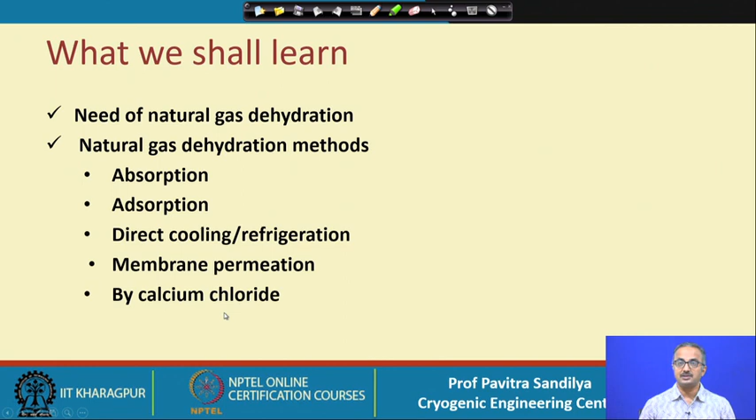Welcome. After learning the basics of the various processes involved in natural gas processing like heat transfer, fluid mechanics, mass transfer, etc., now we shall go to the actual processes, one of them being dehydration. This lecture will cover the need for gas dehydration and methods like absorption, adsorption, direct cooling, membrane separation, and use of calcium chloride.

So first let us see why we need to dehydrate natural gas. There are various reasons for that. One is to avoid formation of gas hydrates, which form when water adsorbs or captures gases like methane, ethane, or carbon dioxide present in the natural gas, forming a solid that looks like ice.

These hydrates, when formed, can choke plug valves, fittings, and pipelines, and water can also react with acid gases like H2S, CO2, etc., corroding the pipelines and equipment.

Then water itself can freeze and form ice, causing erosion and corrosion of pipelines. If we are carrying out cryogenic processes like liquefaction of natural gas, these become difficult in the presence of water, because water will freeze and choke the pipelines.

Presence of water vapor also increases the volume of the natural gas and reduces its calorific or heating value. So these are some of the reasons for which we need to dehydrate or remove water from natural gas.

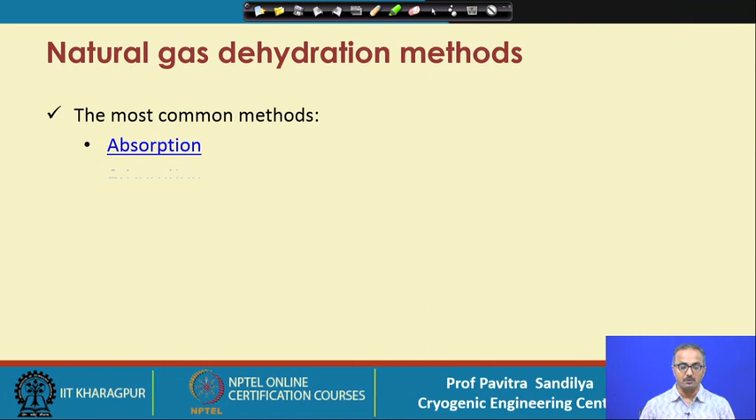Here are some common dehydration methods: absorption, adsorption, direct cooling or refrigeration, and some less common methods being developed, like membrane permeation and use of calcium chloride. Membrane permeation is still being researched, but for now we are more concerned with absorption, adsorption, and direct cooling. Let us see each of these processes one by one.

In absorption, a very common process, water is removed by absorbing it in a solvent. The solvents used in this industry are glycols: monoethylene glycol, diethylene glycol, triethylene glycol, and tetraethylene glycol. These are some commonly used solvents to remove water, and among these, triethylene glycol, or TEG, is most common.

Why? Because among all the glycols, it is easier to regenerate. These glycols are regenerated by passing steam over them, so it is easy to regenerate TEG, and we can get about 98 to 99% of the TEG back after regeneration. It also has a higher theoretical decomposition temperature.

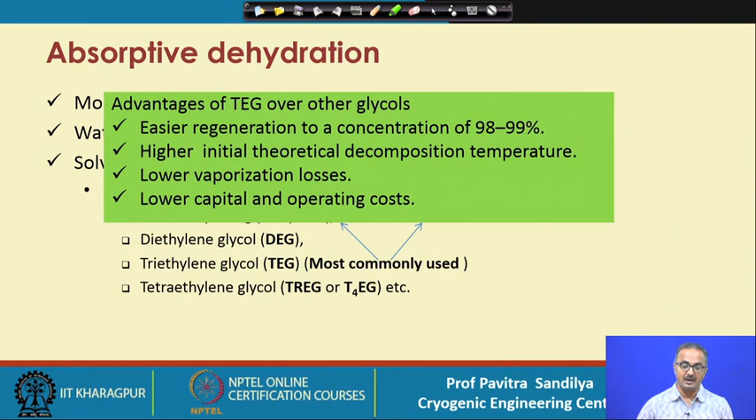We want the solvent to not decompose at high temperatures. TEG has a very high decomposition temperature, meaning it is quite stable, and it has low vaporization losses, meaning it will not vaporize easily into the natural gas, reducing contamination of the gas. It also has quite low capital and operating costs.

Here is a typical representation of absorption of water by TEG. The wet gas, meaning natural gas with water, comes through a scrubber. In the scrubber we remove all particulate matter, and then it goes to a column which we call the absorber, where we contact it with the TEG.

We call it lean TEG, meaning it has less water. It goes down while the gas moves up due to buoyancy, and at the bottom we get rich TEG, meaning it now has a lot of water with it. This rich TEG is again flashed, and we learned about flash earlier, so we can see applications of the fundamentals we learned earlier in this processing of natural gas.

Here we find that by flash, the hydrocarbon vapors are taken out and we get rich TEG. This is further passed through an exchanger, where we are passing in some oil to get back the TEG. Ultimately, we put the lean TEG back into the column, whereas the gas goes out of the column with reduced water content, and we call it dehydrated gas. So this is the overall representation of the dehydration process.

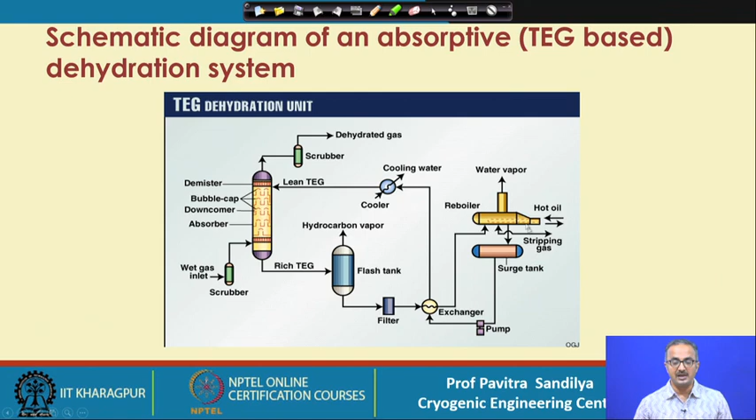The advantages of this absorptive dehydration process are that it has low equipment cost, it offers less pressure drop, and that pressure drop translates into pumping cost. So we are reducing the pumping cost also, and it is a continuous operation.

That means we do not need to make up the loss, because we are not losing much of the TEG. We are able to recover almost 98 to 99% of TEG, so we do not need to put too much makeup TEG or solvent into the system. We have little problem in recharging the tower, and it can handle fouling-causing materials, which pose a problem in adsorptive dehydration.

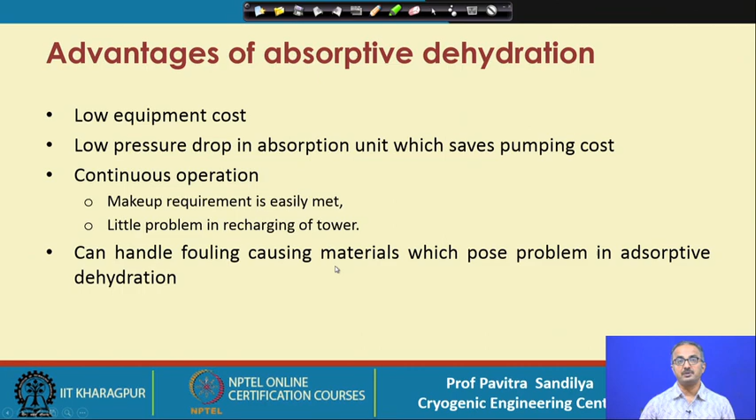So we are reducing the chances of fouling, but it has some disadvantages also, like the glycol solutions may get contaminated by suspended matter like iron oxides, from rusting. If there is rusting, iron oxide will come from there, along with scale formation, dirt, etc. These can contaminate the glycols.

Then there could be sludge formation when the glycols get overheated, and this sludge collects on the surfaces of the various equipment. It may also cause stoppage of flow, and it will reduce proper contact between the solvent and the gas, reducing the efficiency of dehydration.

Then they may form corrosion products by reacting with oxygen and hydrogen sulfide. They also need a separation unit to remove hydrocarbons, water and lubricating oil from natural gas, otherwise these will react with the glycols and cause foaming.

And when there is a lot of foam, the gas will carry over the liquid along with it. So there will be loss of this material, increase in viscosity, or even freezing of glycol at lower temperatures. That means the glycol may freeze at lower temperatures.

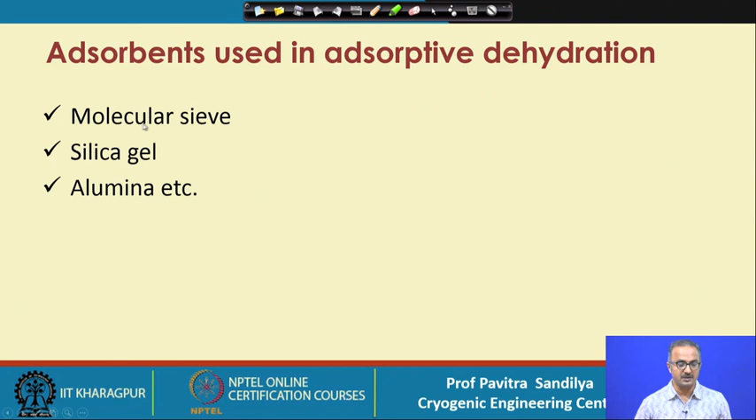Now we go to another topic, adsorption. In adsorption, we have various types of adsorbents used, like molecular sieve, silica gel, alumina, etc. And these are the factors involved.

Then the hydrocarbon binders present in the molecular sieve get partially oxidized in the presence of oxygen. So we have to make sure there is no oxygen in the system, because once the molecular sieve gets partially oxidized, it will form alcohol and carboxylic acid, which will turn into water and carbon dioxide.

This oxygen can also convert H2S into elemental sulfur, sulfur dioxide and water, and it can produce olefins that form coke and deposit in the bed. If they deposit on the bed, they will choke it and reduce the capacity of adsorption.

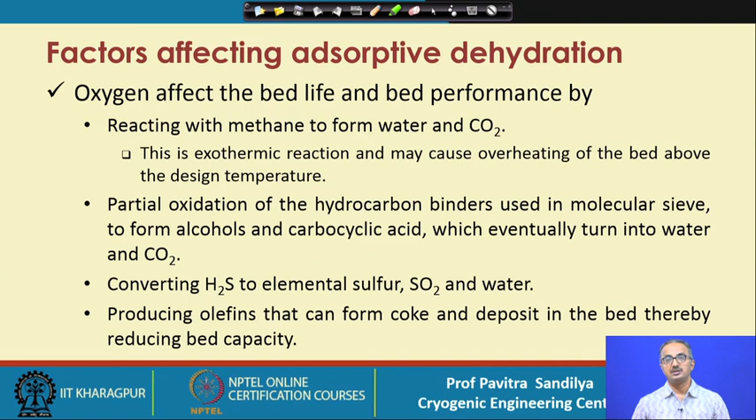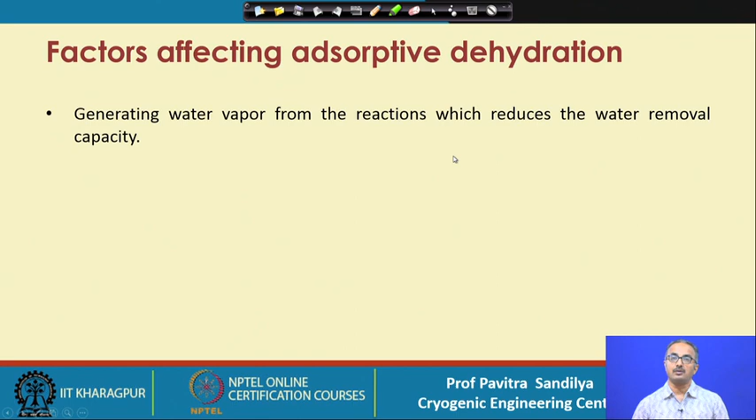Oxygen will also generate water vapor when it reacts with other hydrocarbons, and this will cause a reduction in water removal capacity by generating extra water due to these reactions.

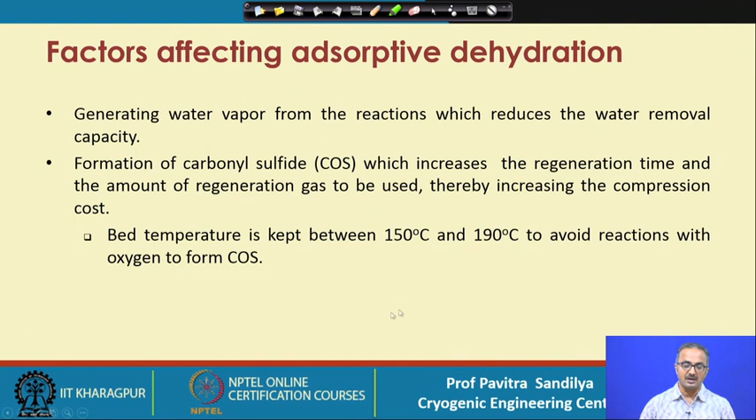It can also form carbonyl sulfide, which increases the regeneration time and the amount of regeneration gas needed, increasing the cost of gas compression. The bed temperature should be kept between 150 and 190 degrees centigrade to avoid any reaction forming carbonyl sulfide. Here is a typical adsorption system for dehydration.

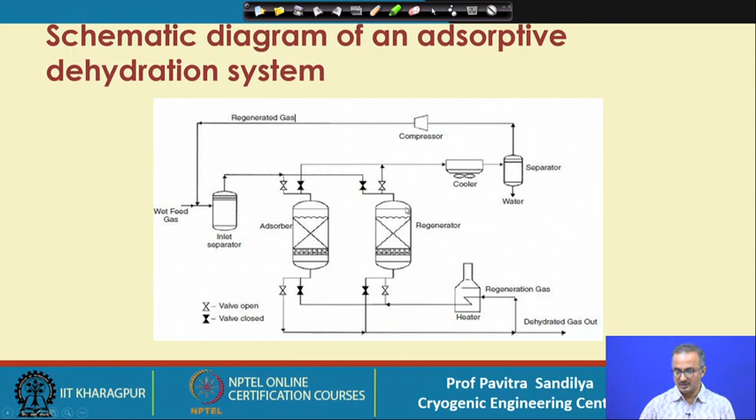Now let us look into the advantages of adsorptive dehydration. We find that they have a lower dew point, and we learned that dew point represents the water content of the natural gas. So a lower dew point means less water, and they can give better dehydration for the natural gas. They are also less affected by changes in flow rate, pressure and temperature.

They are less susceptible to corrosion or foaming, which was the case with the solvents—solvents can foam, but this is not the case here. They are best suited for large volumes of gas under high pressure, and they have higher contact temperatures that may be tolerated with some adsorbents without causing destruction of the adsorbent, meaning destruction in terms of their chemical or physical nature. So they cannot get destroyed by higher temperature.

Some of them can withstand high temperature, and they have high tolerance to sudden load changes, especially during startup. If there is a change in the flow rate of the feed natural gas, they can still sustain operation without sacrificing performance. They can be quickly started up after shutdown, and they have high adaptability to some hydrocarbons in addition to dehydration functions.

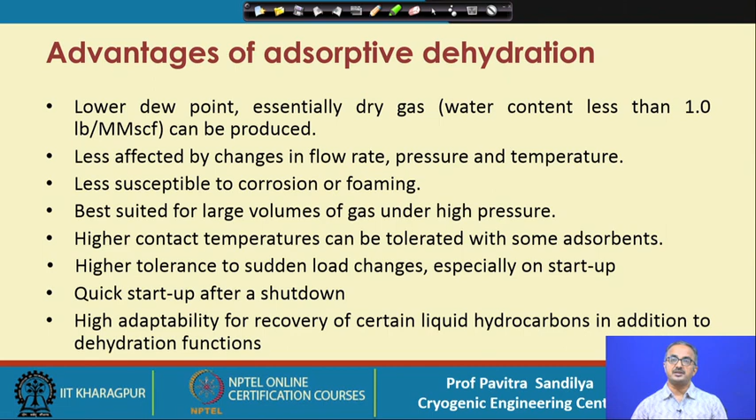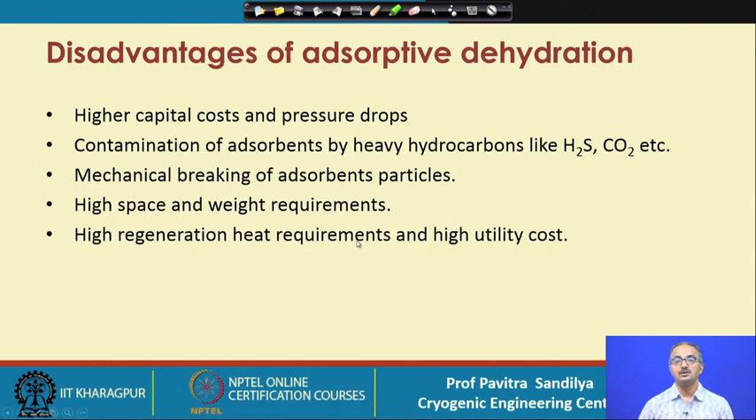They also have some disadvantages, like high capital cost, and they result in higher pressure drop. They can get contaminated by heavy hydrocarbons like H2S and non-hydrocarbons like CO2, and they can undergo mechanical breaking due to attrition. They need high space for accommodation, which increases the weight of the system, and they have high regeneration requirements, meaning the heat or energy requirement for regeneration is higher for these adsorbents.

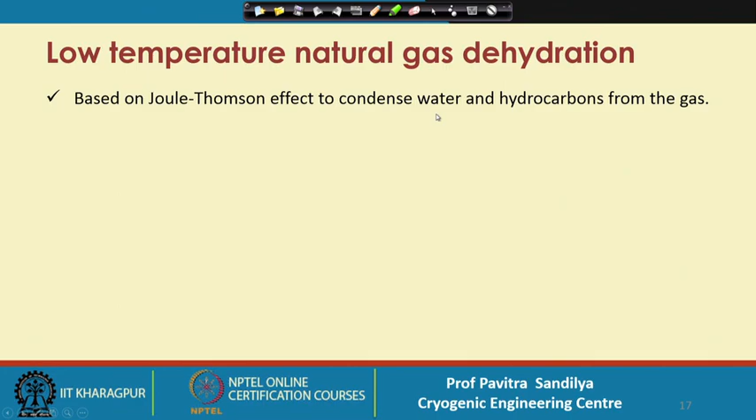Now we come to direct cooling or refrigeration. Here we find there is a Joule-Thomson effect. This effect is found when we pass gas through a valve, and on expansion downstream of the valve, there can be a reduction in the temperature of the gas. This effect is called the Joule-Thomson effect, after the two scientists who discovered this phenomenon. So this effect is the basis of cooling the natural gas, and when the temperature is lowered, the water vapor can get condensed out from the natural gas.

But in this case, gas hydrates may get formed, and as we learned, gas hydrate formation has a bad effect on the process because they will choke the system. To reduce the formation of gas hydrates, we can inject some of the glycols which we are using for absorbing water, so that these gas hydrates get destabilized and will not form.

The other way is that we externally heat the system to destroy these hydrates. So these are the things we have to do if we find there is too much cooling and water is going towards solidification.

By this low temperature dehydration, we can remove both the water and the natural gas liquids, that is NGL, about which we shall learn later on.

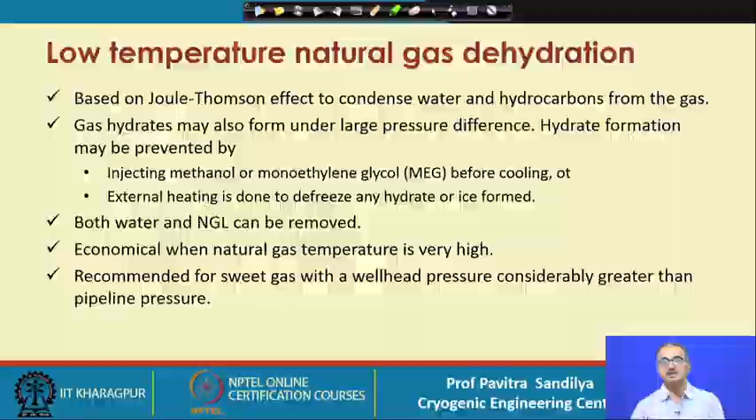This is economical when natural gas temperature is very high, and it is recommended for sweet gas with a wellhead pressure considerably greater than pipeline, because when the pressure is very high, on this Joule-Thomson expansion we get higher cooling. So a high pressure is desirable upstream of the Joule-Thomson valve. If the initial pressure of the natural gas is high, then this works very efficiently.

This is often used not alone, but in conjunction with other dehydration processes, like with solvents or adsorption, we use this low temperature method.

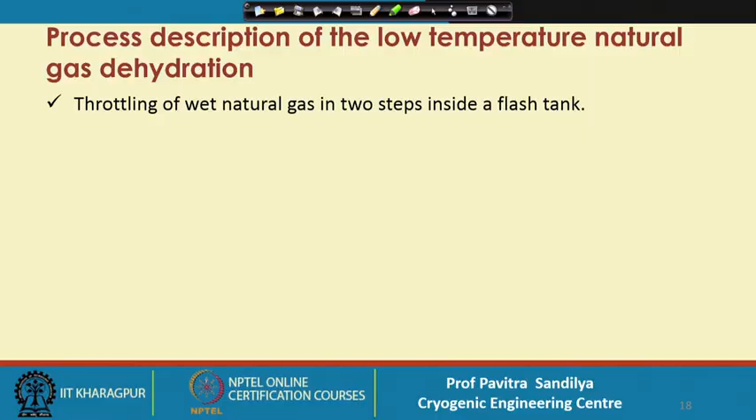Now here we have the process description. What we first do is throttle the wet natural gas in 2 steps, and with this Joule-Thomson valve, it causes partial condensation of water vapor, and the droplets are removed by demister inside the flash tank. Then we use some air pre-cooler and external cooler, if we find the pressure difference is insufficient to cause enough cooling by the JT valve.

When we are using this pre-cooler or external cooler to compensate for the reduced cooling by the JT valve, what we are essentially doing is increasing the operating cost of the processing. So if the usable pressure difference is large, then JT causes more cooling.

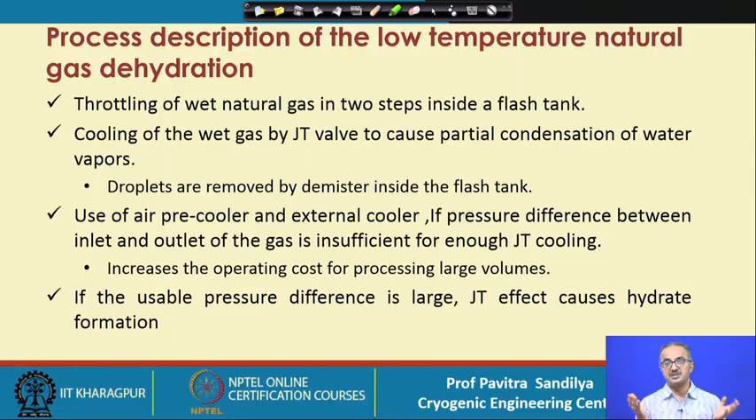As I told you, if we have a very large pressure difference between the inlet and outlet of the JT valve, we will find there will be enormous amount of cooling, and that cooling may result in hydrate formation. So whenever we are operating such plants, we have to see to it that the delta P, that is the pressure difference across the valve, is not too small or too high.

If it's too small, it will be needing some pre-cooling, and if it is too high, it may lead to hydrate formation. So these are the ways we have to optimally choose the operating conditions and the other equipment. External heating will be needed if there is any kind of hydrate formation or formation of ice.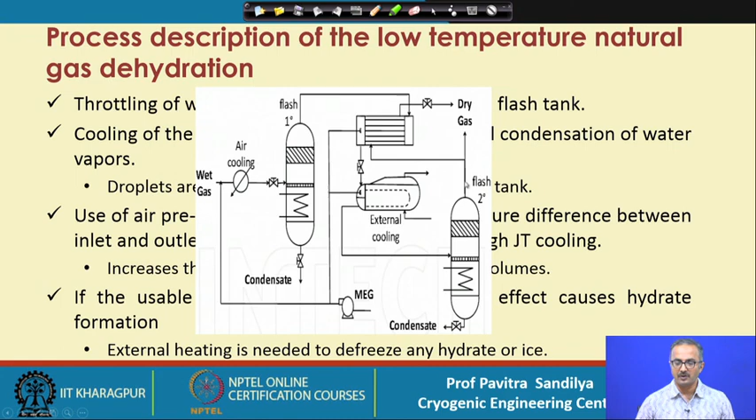Here we find that we are putting a glycol. As we said, this works well in conjunction with another system, like in this case we are doing absorption. So this glycol is put to again dehydrate this thing, and this is done in 2 steps to remove the condensate, that is basically water, from the natural gas, and ultimately we get the dried gas from this second column.

Now the advantages and disadvantages are like this: in the advantages, this low temperature dehydration can meet water and hydrocarbon specifications for pipeline gases when we have enough or high enough wellhead pressure available, and their operating cost is low if we have the naturally occurring pressure, and the corrosion problem is also minimal, especially when the hydrates are not formed.

But their disadvantages are that they are less efficient, as they cannot lower the dew point of the water for pipeline transfer. If they cannot lower the dew point, it means they are not removing enough water from the natural gas, and they are unattractive when we do not have enough wellhead pressure.

That means we try to utilize the wellhead pressure to drive this particular type of process without the use of any kind of compressors, and we have to use some hydrate inhibitors and some external refrigeration. These will increase the capital cost and the operating cost. That means to remove water, again we are adding another chemical which is in a way also increasing the processing cost of the natural gas.

Then we have other methods like membrane permeation. In membrane permeation, what we are doing is having this feed gas which is pre-treated to remove any kind of particulate matter, then it is heated and then it passes through some membrane.

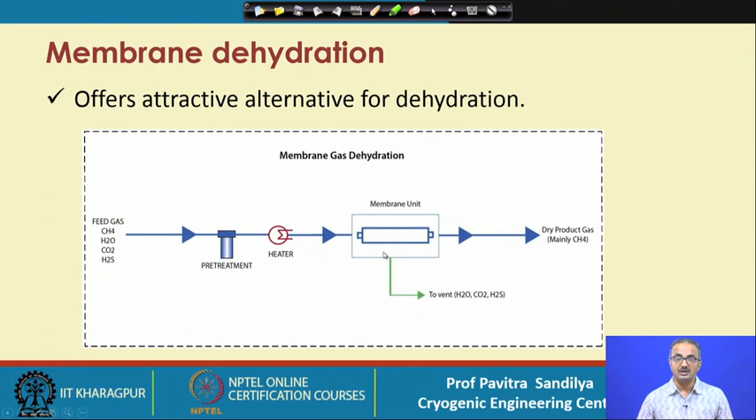And what are membranes? As we learned, membranes are some semi-permeable barrier, so they will retain some of these solutes and some of them will be passing through the membrane. We find that through the membrane, H2O, CO2, H2S are passing through. That means the gas which is retained on the membrane will be almost a dry gas. So this is how the membrane is working for dehydration.

The preferred operating conditions are that inlet gas must be at least 10 degrees centigrade above the dew point of water. Otherwise, the water will condense and settle over the membrane surface, preventing further separation.

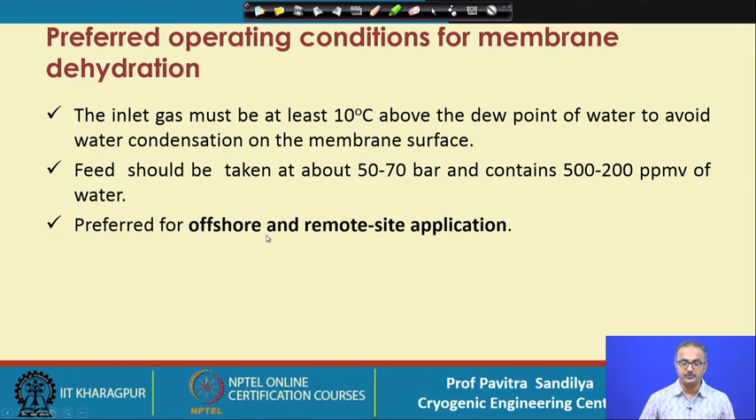The feed should be taken at very high pressure with very low contaminants, because high pressure is needed for driving the particular solute through the membrane. These conditions are generally preferred for offshore and remote site applications.

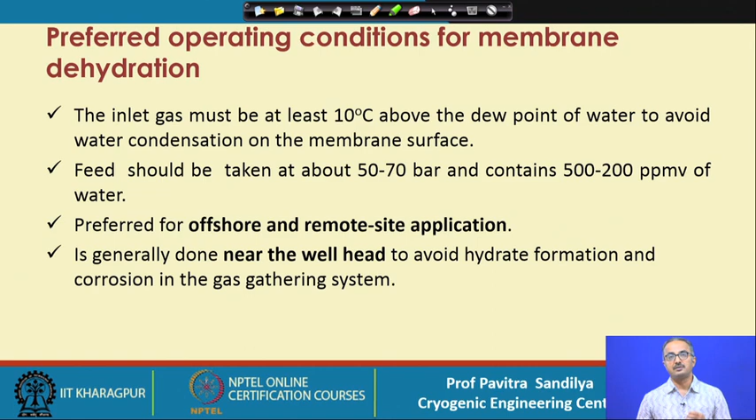It is generally done near the wellhead, because there will be quite high pressure there, and the temperature is high enough to avoid hydrate formation and corrosion in the gathering system. So hydrate formation and corrosion will be reduced if done near the wellhead due to the high temperature.

These are some of the membranes used, basically hydrocarbon based materials. Pebax is a thermoplastic elastomer made from polyamide and polyether, and we also have sulfonated polyether ether ketone, known as SPEEK.

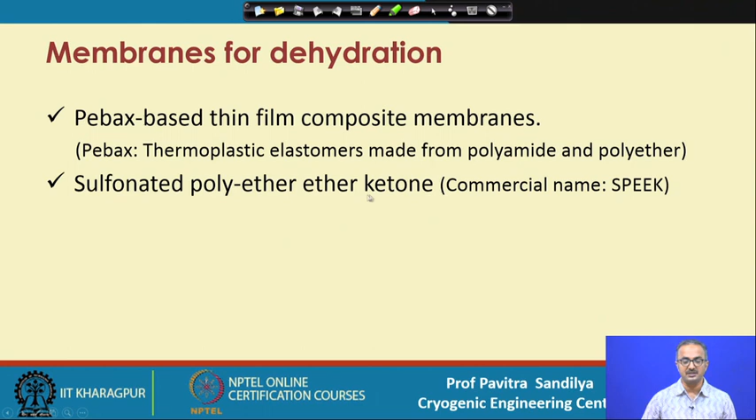Some advantages of membranes are modular construction and less weight. Modular construction means they come in small units, so depending on demand, we can reduce or increase the number of modules for operation. All the modules need not be run together.

They also have a very large turn down ratio, meaning the ratio between maximum and minimum capacity is quite large. That means they can handle large fluctuations of the feed flow, and they have low maintenance and low operating cost.

The disadvantages of the membrane process are that they are quite complex, they consume high energy, and their operating costs are large because they need multiple stages and sometimes recycling. They are also very prone to mechanical and thermal damage due to high pressure and high temperature.

Some amount of methane is lost into the water vapor permeating through the membrane. That means we are losing some of the methane present in the natural gas by permeation through the membrane, which is not desirable. This makes membranes non-competitive with absorption, because in absorption no methane is dissolved in the solvent. So membranes are not very good compared to the absorption process.

These membranes also need some feed pre-treatment. Otherwise, any particulate matter present in the natural gas will choke the membrane pores and reduce the efficiency of separation through the membrane modules.

Lastly, we have calcium chloride. This is not much used now. It is based on adsorption, and it is used for only small capacity, about 2.5 million standard cubic feet per day.

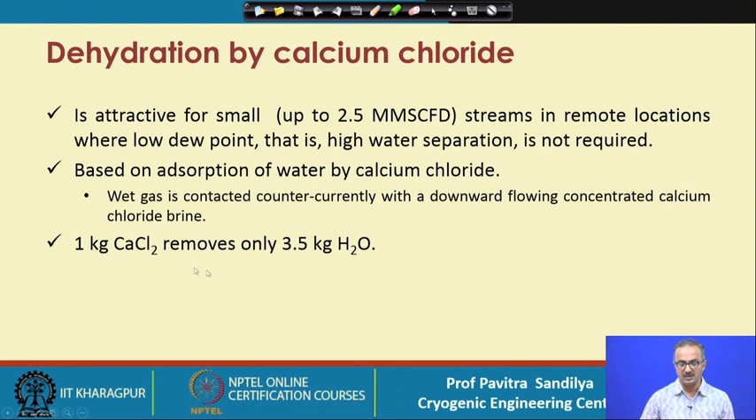The wet gas is contacted countercurrently with a downward flowing concentrated calcium chloride brine solution. That means the wet gas moves up and the brine solution comes from top to bottom, getting contacted countercurrently. It is found that about 1 kg of calcium chloride is needed to remove about 3.5 kgs of H2O.

Its advantages are that it can operate unattended when using fresh calcium chloride. It has no fire hazard, it is quite compact, and it has low capital cost.

On the other hand, the dew point limits the use of calcium chloride, because all these things are dictated by equilibrium. So the dew point is one consideration that leads to this equilibrium between water and calcium chloride.